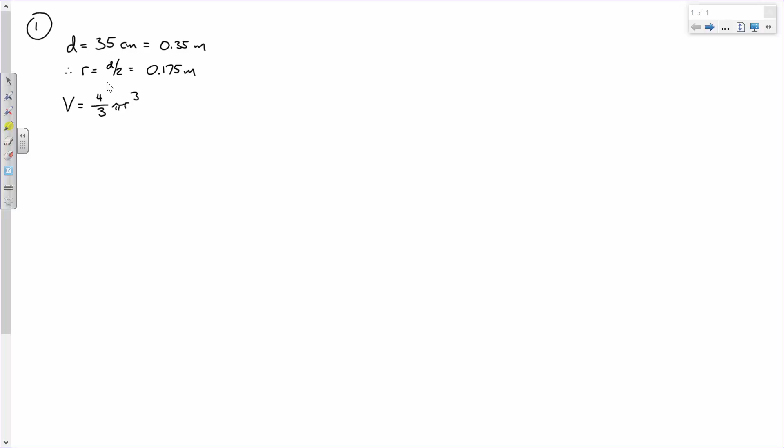Now, anybody remember how to compute the volume of a sphere? Diameter squared over 4? No, that's the area of a circle. Remember? It's 4/3 pi r cubed. If you didn't know that, and you were on the exam, what would you do? Don't say pray or guess. Somebody said look it up - it's in the reference manual. All right, so 4/3 pi times

0.175 cubic meters. So what is that? Everybody in here should have their Casio FX115 ES Plus or equivalent FE approved calculator. Find it between now and exam day. That gives 0.0224 cubic meters. Everybody okay with this?

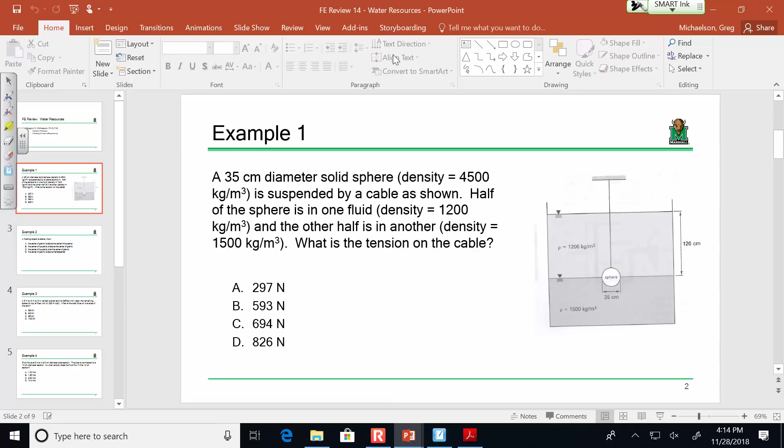So if you know the volume of the sphere, how do you determine the weight of the sphere? Well, you would take the unit weight times the volume. So the unit weight of the sphere times the volume. But what is the unit weight of the sphere? Do we know it? We know the density. So because we know the density, we can determine the unit weight by doing what?

So rho for the sphere times gravity times the volume will give us the weight of the sphere. That's 4,500 kilograms per cubic meter times 9.81 meters per second squared times 0.0224 cubic meters. Plug and chug all of that, and what's that going to give you? 991.0.

991.0 Newtons. Now let's see if we understand the physical significance. We have this ball being suspended by a cable. Ignore the fluid for a moment - if the fluid didn't exist, what would be the tension on the cable? 991. But what's the fluid doing? The fluid is basically pushing up on the cable a bit because that sphere has to displace the volume of the fluid - specifically half of the lower fluid and half of the upper fluid. So if we can determine the weight of the fluid being displaced by the ball, and take the difference, we know the tension in the cable. Everybody okay with this?

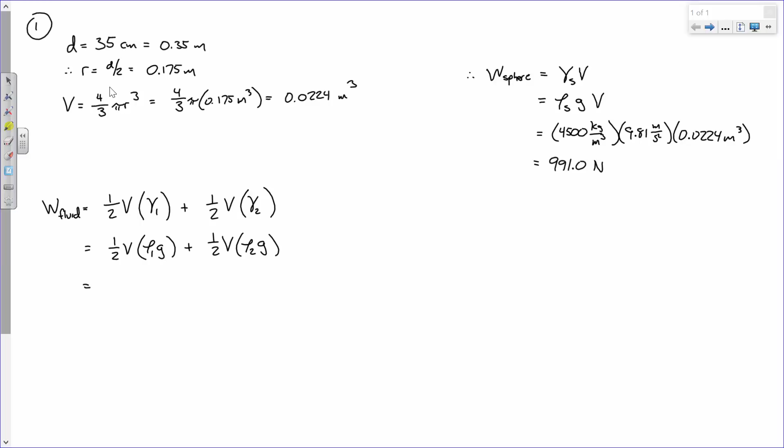Well, I don't have a unit weight, but I have a density. So I can take the density of the first fluid times gravity, plus rho 2 times gravity. Now, I'm lazy, so I like doing as few mathematical operations as possible. Each of these terms has a V/2 times gravity common term, so I'll pull that out and say V/2 times gravity times rho 1 plus rho 2. Everybody okay with that?

It's too early or too late or too something for that. All right, so we have 0.0224 cubic meters over 2, times 9.81 meters per second squared, times the sum of our densities: 1,200 kilograms per cubic meter plus 1,500 kilograms per cubic meter.

So plug and chug that, and what do you get? 308.4? Do I have a second on that? No, I got 296.65. That's what I got, 296.65 to 296.7.

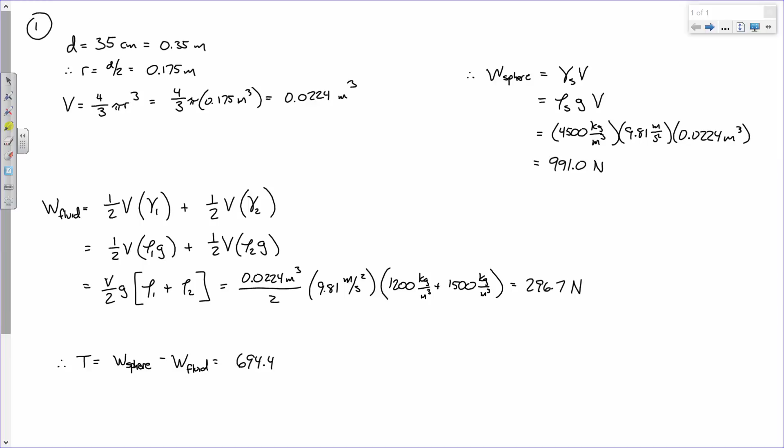694.35. 694.4? Yeah. So the answer is what? C. What do you think? That's not bad, right?

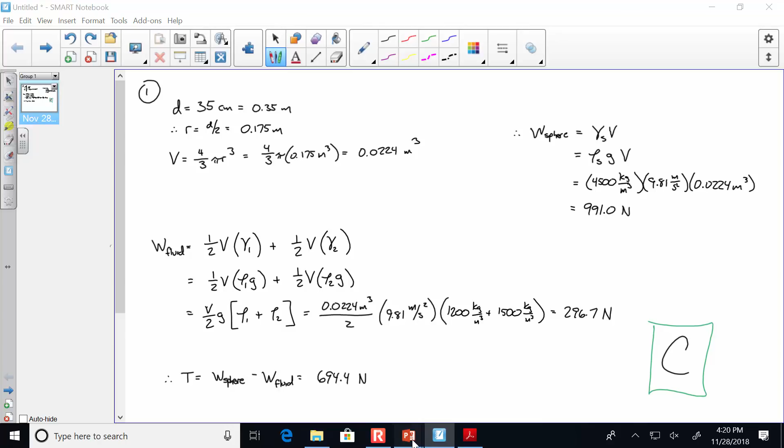Any questions on that? All right, uh-oh, this is a question with words and no numbers.

I wish I had those things where you all can use your phones and vote in, like Who Wants to Be a Millionaire, and poll the class. I wish I had that set up. Chemistry? The clickers? They have clickers. They're expensive, it costs a ton. I don't even think they use them anymore because we hate them so much. I've never had it. They still use them, there's a website you can do it. All right, somebody set it up for it.

Okay, let's just go, a floating object is stable when what? So let y'all look at it for a little bit. You just raise your hands.

Okay, let's do that. Who says A? We'll read it for a second, then we'll do the poll. Let's go. Let's Google it, hey, come on. All right, who says A? Who says B? Who says C? Who says D? Yeah, I have B.

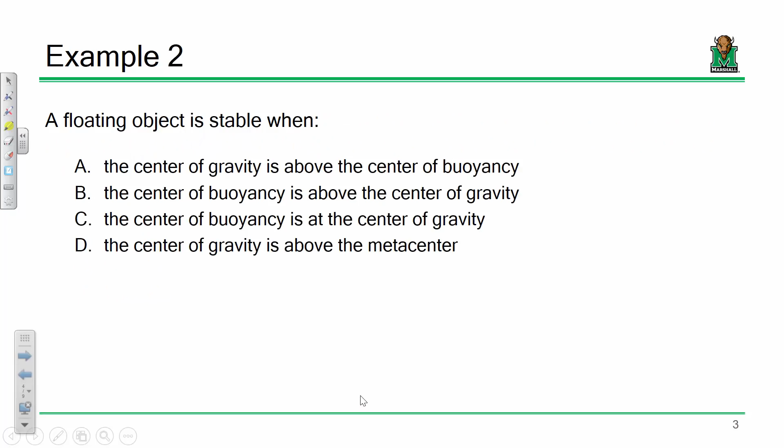That's you, my goodness, I'm moving on. Okay, fluid statics, breaking out the specific gravity terminology. So we have a cube, 6 meters by 6 meters by 6 meters, and it's half filled with water, and the remaining space on top is filled with oil. So the oil has a specific gravity that's obviously different than that of water, so our pressure distribution is a little different. So what is the total force on one side of the tank? Okay, let's see if we can figure that out. Now first off, right off the bat, let's put this up here.

So what is the unit weight—well, how about this, what's the density of water? 1,000 kilogram per cubic meter. And the unit weight of water is what? 9810 Newton per cubic meter, right? What's the temperature in the room? That's right, that's it, that's right. Yeah, that's right, what does she say?

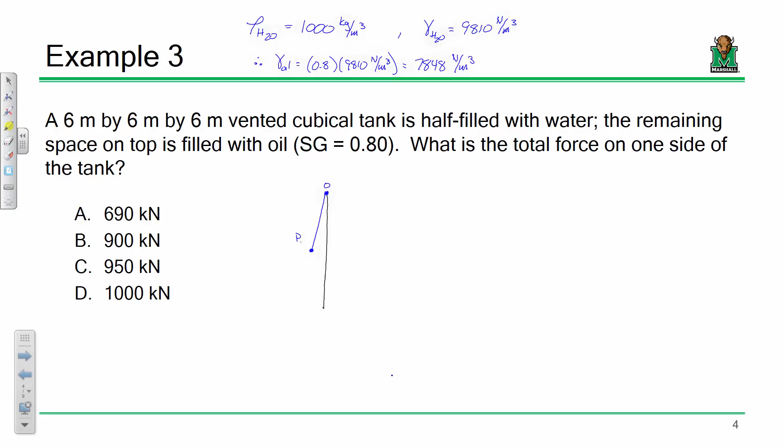So here's our wall, and let's look at our pressure distribution. First off, hopefully we recognize the pressure increases as a function of depth, right? The deeper you get, the higher the pressure. So what's going to happen with our pressure distribution: we start here at the top, and then we go down 3 meters and we get a pressure. So this is 0, then we have some pressure P1 right there, and this distance is 3 meters. Once we get below 3 meters, we drop into our second fluid, and our second fluid is heavier, so the pressure distribution changes. So at the bottom we have P2, and it goes down something like that. Everybody remember that?

So here, I'll walk you through it. First off, how do we determine pressure number 1? Well, you get unit weight times change Y, there we go. And it's the unit weight of the oil, times 3 meters, right? So that is 7,848 Newton per cubic meter times 3 meters, which is what? 23,544 pascals, there we go.

Now, how do we determine pressure number 2? Well, we take pressure number 1 and we add to that the gamma for water times 3 meters. Let's bring it back. So we have 23,544 pascals plus 9810 Newton per meter cubed times 3 meters, and that equals what?

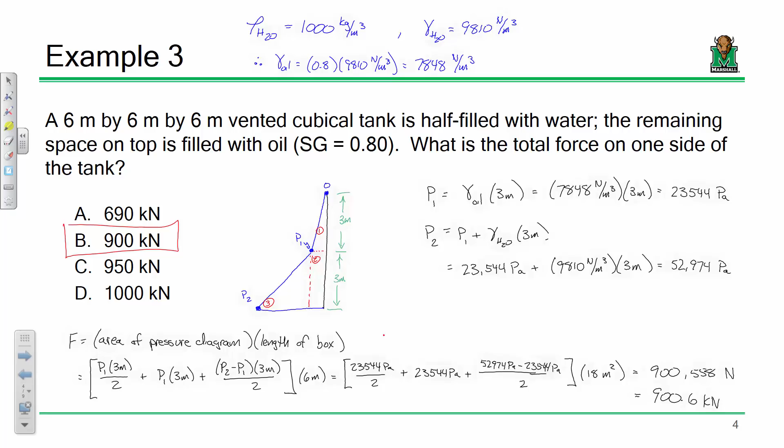Any other questions? Keep in mind, these are really basic problems, I don't have any parabolic surfaces or anything like that. Is that kind of typical for the FE, or is it gonna be all kinds of crazy stuff? Probably not. Now, that's not to say you aren't gonna deal with circular cross sections. You might have an open channel flow, like a circular cross section that's only half full. In fact, we have a problem like that. That's pretty reasonable, because you can do that by hand pretty quick.

I'm pretty sure the manual has some guides for, dependent upon your cross section, what's your hydraulic radius as a function of how deep it is. I'm pretty sure there are guides like that in the manual. I have one like that, but it's easy, so you can do it yourself.

Sound good? All right, next one. So we have fluid flowing at 5 meters per second into a 5 centimeter diameter pipe section. The pipe is connected to a 10 centimeter diameter section. So what velocity does the fluid flow in that section? All right, so anybody remember what we need to do, or what type of problem is this?

That's a continuity problem, right? A-V-in equals A-V-out, exactly right. So the flow in equals the flow out. That's what we just did. He just can't remember what we did last week. Or yesterday. Bless you. So Q in equals Q out, so that's A-V-in equals A-V-out.

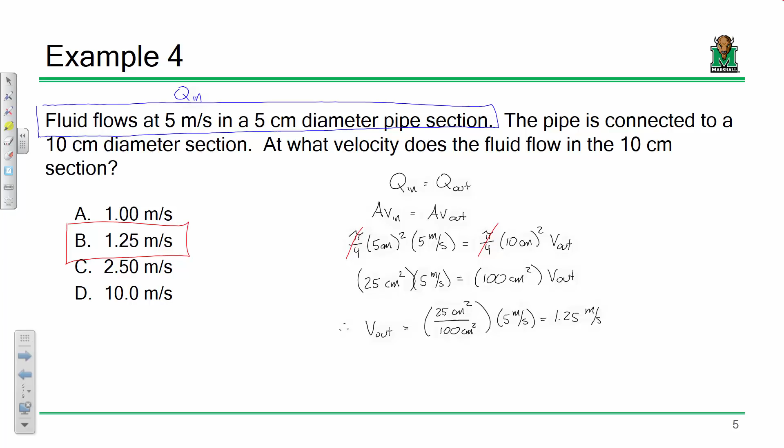Next one. A liquid with a specific gravity of 0.9 is stored in a pressurized closed tank. So how we handle that pressure is we're gonna have to take that into account pretty carefully. The top of the tank is experiencing a pressure of 200 kilopascals. So spoiler alert, we're gonna have to take that and subtract the atmospheric pressure, right? Y'all remember that? Take the absolute pressure, subtract the atmospheric. The tank is cylindrical with a diameter of 10 meters. We have an absolute pressure of 200 kilopascals. What's the initial velocity of fluid when a 5 centimeter diameter orifice is opened at point A?

Does anybody know basically what equation we're going to need to use for this problem? Bernoulli. It's basically a Bernoulli's equation problem. Okay, let's break that down. But before we do, a couple of things.

We have a fluid with a specific gravity of 0.9. So what's the unit weight of this fluid? Well, it's 0.9 times the gamma of H2O, 0.9 times 9810 Newton per cubic meter. And what is that? 8829. Say it again, 8829. Sound good? All right.

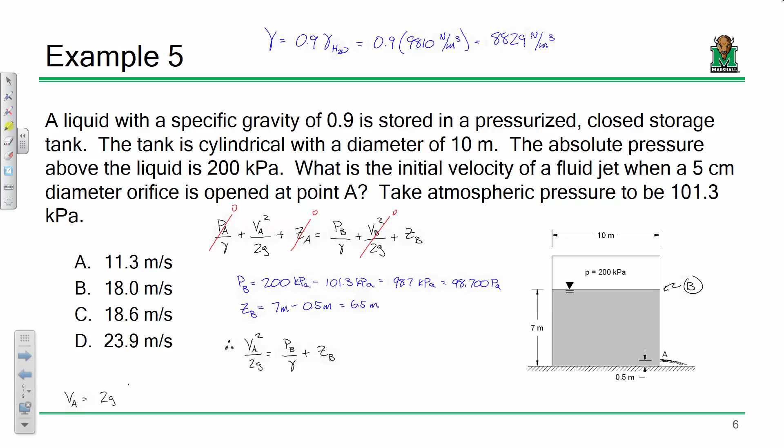It's true, so we pretty much have everything that we need to solve for what we want to know. And what do we want to know? The velocity at A. So therefore, what do we have? We have V squared over 2G equals PB over gamma plus ZB. So VA equals the square root of 2G times PB over gamma plus ZB.

Keep in mind, this is from the structural engineer who hasn't done this stuff in a very long time. Say we don't need this, we'll just pack up and go home now. No, you're still doing it. So plug and chug, and what do you get? Yeah, it's what we said.

So the short answer, I understand there are shortcuts with stuff like this, but I wanted to go through Bernoulli's principle so you can see, oh yeah, that one's zero because of this, and this one's zero because of that. I wanted you to go through that process. So plug and chug, what do you get for this? 18.6 meters per second. There we go.

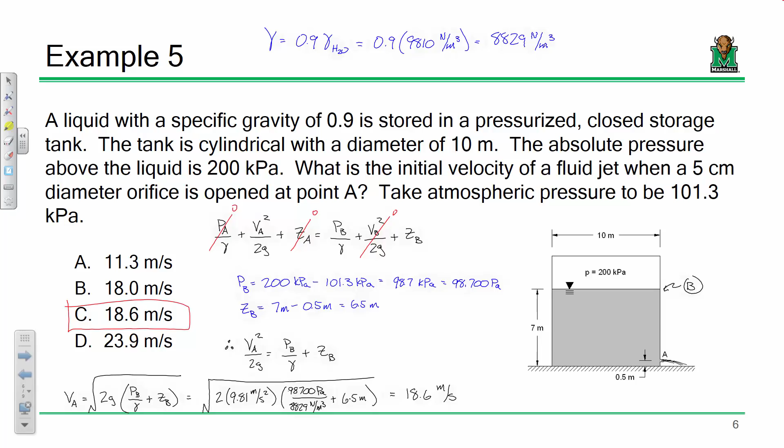What is the hydraulic radius of the trapezoidal irrigation canal shown below? So how do you determine a hydraulic radius? What do you do? Well, it's a fraction. What goes on top? It's the area that goes on top, and the bottom is the wetted perimeter. Exactly right, area divided by the wetted perimeter. Okay, so first let's take care of the wetted perimeter first.

What is this dimension? 5 meters. What is this dimension here? There we go, because that's a 3, 4, 5, and this dimension is 5 meters. So the wetted perimeter is 15 meters. As for the area...

We need the area of these triangles, the area of the triangle on the left and the triangle on the right is just 3 times 4, right? Just add them up as one big rectangle, so 3 times 4. So the area is 3 meters times 4 meters plus 5 meters times 4 meters, which is what? 12 and 20 makes 32. So therefore, our hydraulic radius is area over the wetted perimeter, so it's 32 square meters over 15 meters, which is like 2.13.

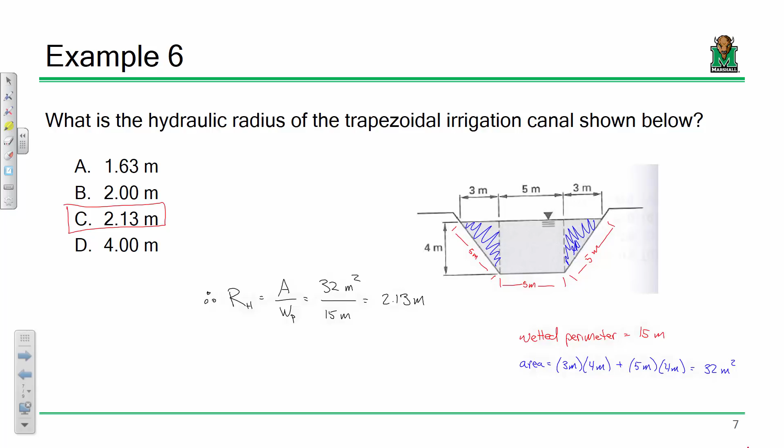Oh shoot, was that a fluids thing or a hydraulics thing? I can't remember, hydraulics, it's blurry for me. It's black. Is there not charts in the handbook for that? I think there are, I was looking, I can't find it. Well, if I remember correctly, they replaced it with a graph, so like if you have a circular cross-section, you take your depth and then you can determine your hydraulic radius. But I just want to make sure y'all remember it conceptually. This is something, I'll be honest, I can't quite remember. Let's check, let's check.

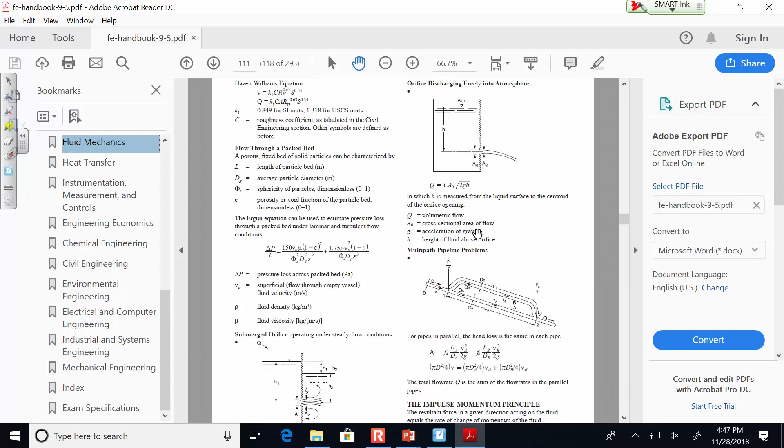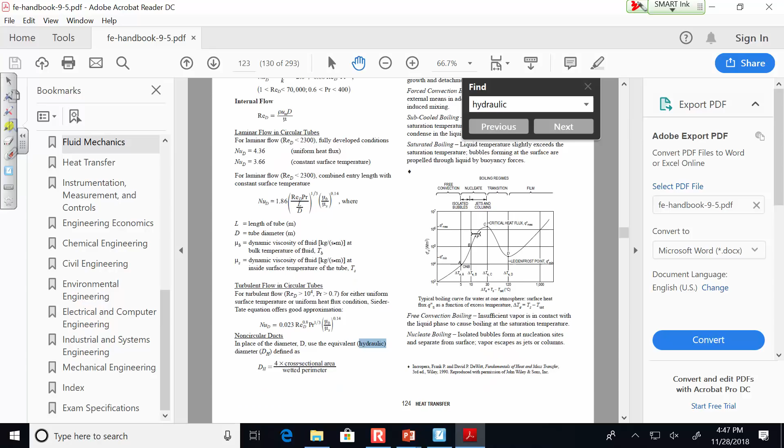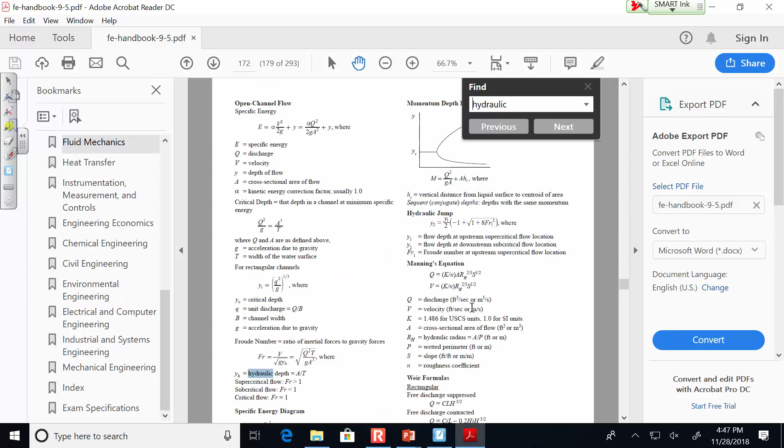Hold on, let's just see. Yeah, when I took my PE exam, I used a reference that had all of this, and I don't quite remember. It might actually not be in here. I don't think it is, because I had a question similar to the one you just did, and I had to manually work it out.

I know the PE exam reference has tables and tables for if you have a trapezoidal shape or a circular shape, and I'd imagine if you all took hydraulics there's a table or series of guides in your textbook. Yeah, Wade always gave us all the equations. Well, okay, but let me be clear, you're not going to be given something ridiculous, there's time constraints as well. All right, any other questions?

All right. Uh-oh, no, a conceptual question. No. I'll let you all read it, then we're gonna poll the audience.

Hi, Regis Philbin here from Who Wants to Be a Millionaire. Courtesy of our friends at AT&T, right? It sure sucks.

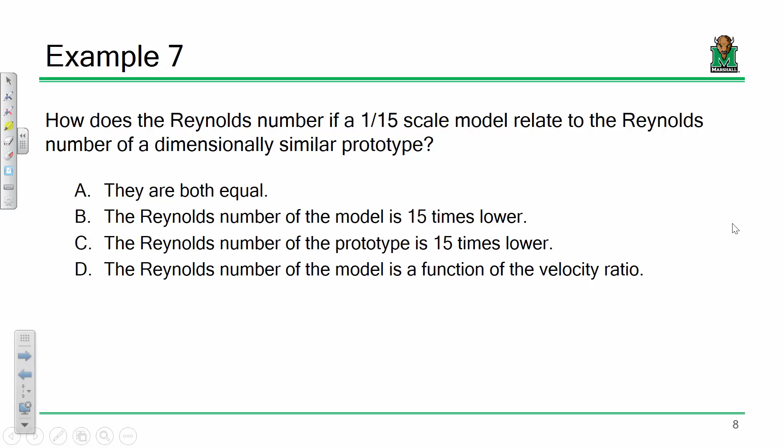Last problem, hydraulics. We have a 12-inch diameter concrete sanitary sewer with a roughness coefficient of N equals 0.013. It flows half full, constructed on a grade of 0.5%. What's the flow velocity in this sewer?

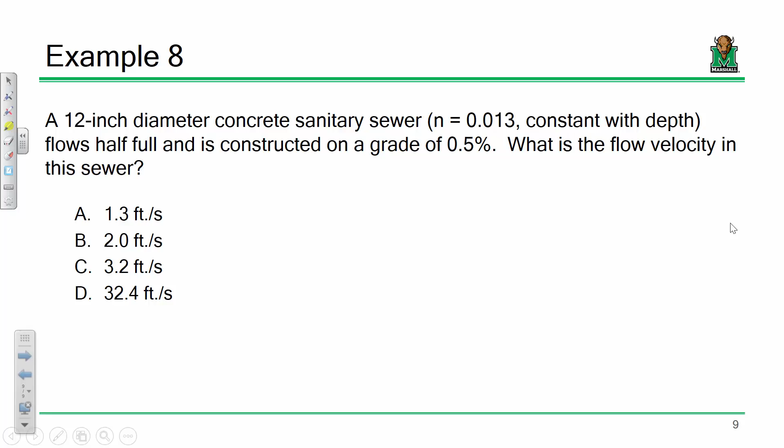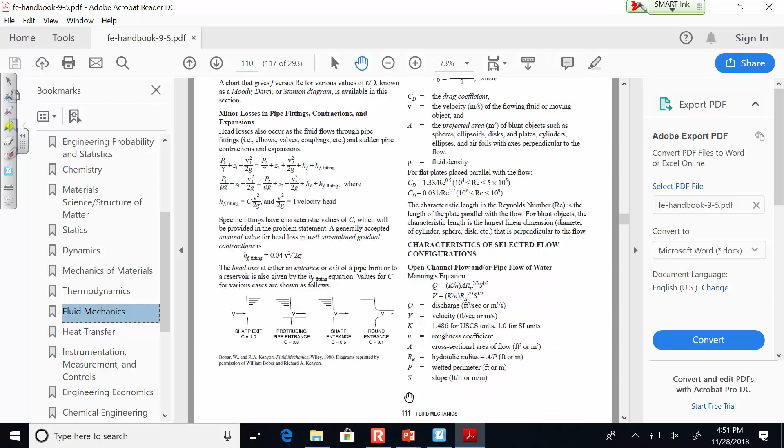So what we're going to need is the following, and I want to refer to the manual. Let's go to fluids, the fluid mechanics section. We need Manning's equation, because we have a roughness coefficient, a slope, and a hydraulic radius we need to figure out. The nice thing about the manual is it has our conversion factor for U.S. units, so all the flows are in feet per second, roughness coefficient, and so on.

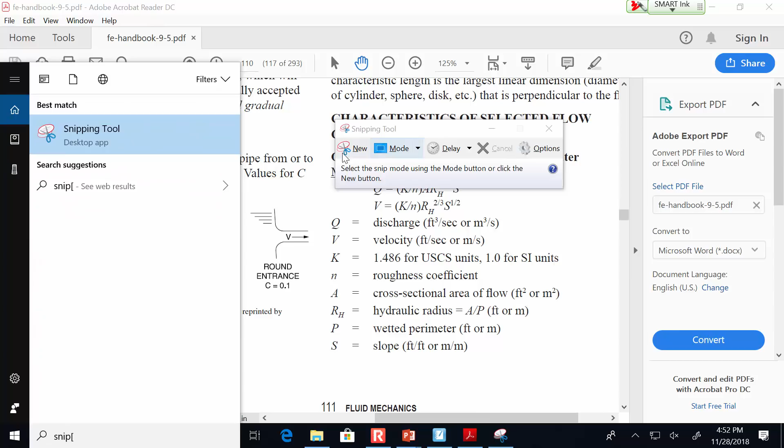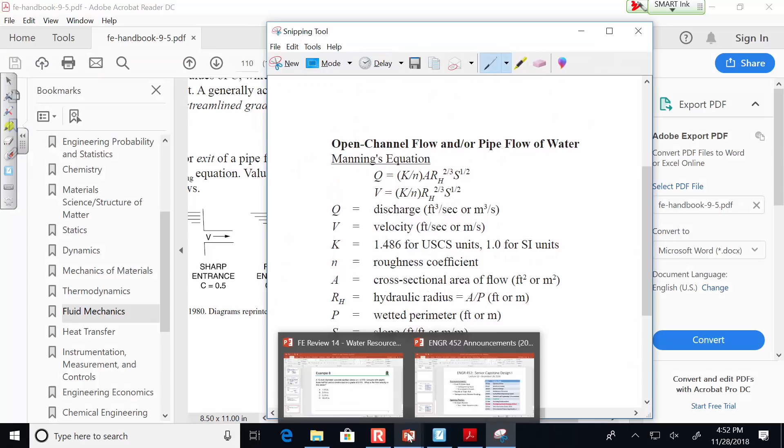actually, let me do something real quick. I know this is a hydraulics problem. Here, we'll do this over here.

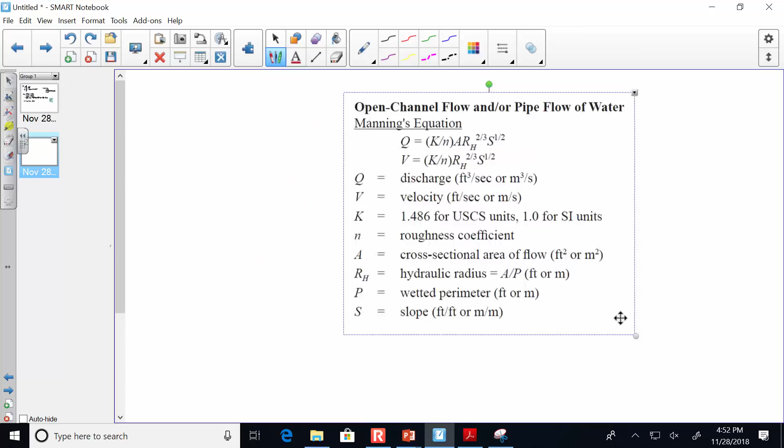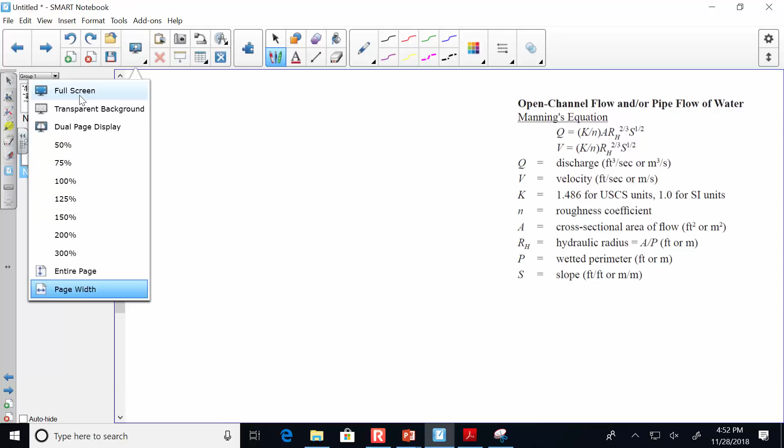On this problem, what they're asking for is velocity, not flow, so we don't need to worry about Q, only the velocity. I'm going to do this problem the long way, just to get everybody apprised.

So what we have is V equals K, which is 1.486 over N, times the hydraulic radius to the 2/3, times the square root of S, since it's S to the 1/2. N in this case is 0.013. We still need to figure out our hydraulic radius, and I'm going to leave that right here.

When it's completely full, the hydraulic radius is just D over 4, right? Yeah, but this is half full.

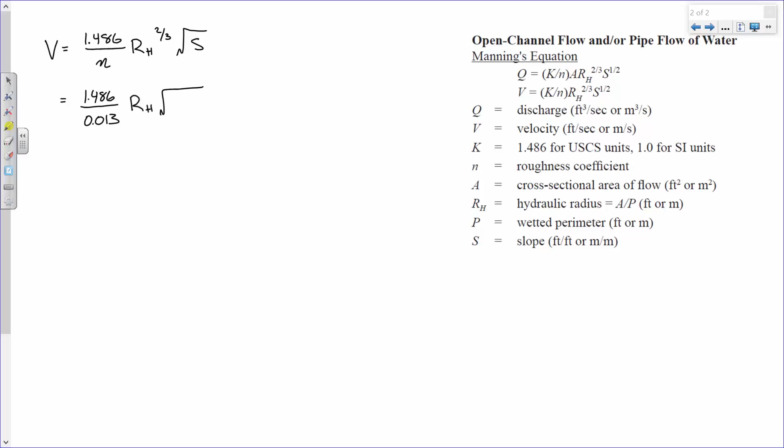And the slope, what was it, 0.5%? So this is 0.005. Oh, I forgot my 2/3. I'm going to mention something about that at the end. Now, as for the hydraulic radius, again, it's the area divided by the wetted perimeter.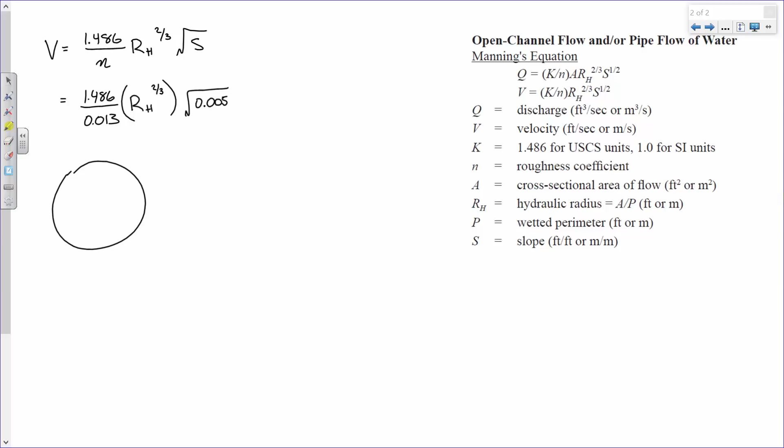We have a pipe that looks something like this, and it's a 12-inch diameter pipe that flows half full. That's the flow, and the diameter is 12 inches. So what is the area of flow?

Well, it's pi d squared over 4, but it's half that, so it's pi d squared over 8. So pi over 8. Now our area needs to be in square feet, so this is pi over 8 times 1 foot squared. So what is that?